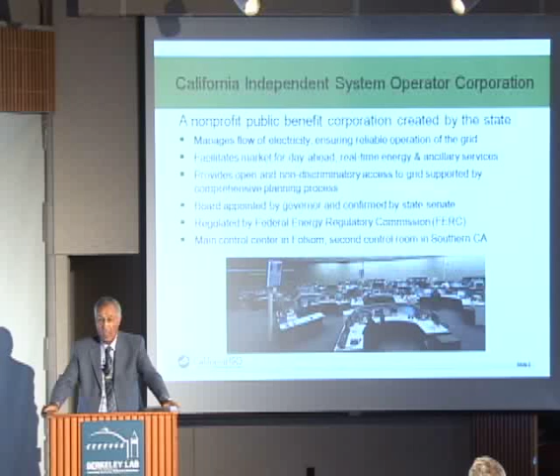What is the ISO? Just a bit of publicity. We are the grid manager in many ways. Our core responsibility is we operate the grid reliably, so we are the custodian of grid reliability for the state of California. We design the electricity market, we operate the electricity market just as we operate the grid, and the two go hand in hand. We're responsible for long-term planning of the grid. We facilitate the day-ahead market, real-time energy, and ancillary services. Ancillary services support the services to make sure the quality of service is appropriate and according to standards.

We provide open and non-discriminatory access to all players to facilitate a competitive wholesale market. We are regulated federally, even though we are a state entity, because it involves wholesale transactions and interstate commerce.

We're governed by a board of 5 appointed by the governor, nominated by a large group of stakeholders. The list is given to the governor, who nominates, and it is confirmed by the state senate.

I am delighted to have 2 of the board of governors in attendance: Chris Hafner, right here in the front, and the chairman, Mason Willrich, from the board of governors of the ISO. I can tell you also that if you want to have the title of governor, you can run for governor of the ISO and you don't have to spend any campaign money. So we call them Governor Hafner and Governor Willrich. When we talk about the governor of the state, we say Arnold.

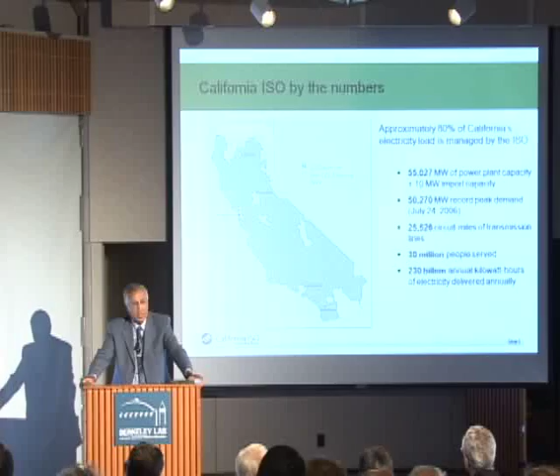So what we do in terms of volume: the state facilities in terms of megawatts capacity is about 55,000. Part of the challenge, and it will be even more of a challenge in the future, is that this state, different from any other part of the country or world, imports about 25% of our electricity needs from out of state. That has been a tremendous opportunity for this state to capitalize on the diversity of resources and prices in the region to make up the whole portfolio needed by the state.

So within the state itself, there's 55,000 megawatts of generation, and the peak demand has been over 50,000. If we only had the 55,000 versus the 50,000, it would have been a very tight situation. But the fact that we have that 25% import, keep in mind most of it is not certain until the very last minute, gives us a challenge but also an opportunity.

In comparison, let's take Spain, for example. I'll talk about Spain and California later, because Spain is also a leader in renewable resources policies. Spain has a demand very similar to ours, around 45,000 megawatts or so, but they have 95,000 megawatts of generation.

So they have almost 100% in terms of reserve or planning reserve. You'll hear a lot of times people say, 'Well, Spain does it, Spain did it.' That doesn't mean it can just as easily be done here like it is there. The challenges are different and the situation is different. They also have a lot more hydro that they can rely on, fluctuating up and down to balance the intermittency of renewables.

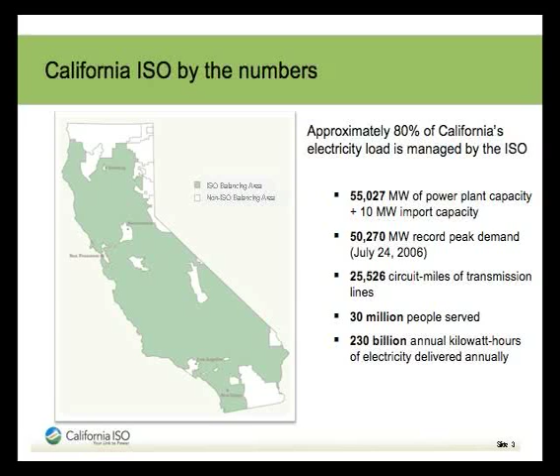We operate about 25,000 circuit miles of transmission. We serve 80% of the people of California—in terms of serve, we mean on the wholesale side. That translates to about 230 billion annual kilowatt hours. Our market includes a day-ahead market.

There are long-term contracts between suppliers, meaning the generation supplier versus the utilities. There's over-the-counter trading, shorter term like a month or a week, and there's the day-ahead market, which is when it comes to clearing on our market.

We also have a real-time market, and that real-time market operates on a 5-minute basis. So if you come and visit our control room, you will find a ticker just like you have in the stock exchange, where those prices are updated every 5 minutes.

Just to give you an overview, we price over 3,000 nodes or points around the system every 5 minutes. And that takes care of tens of thousands of bids every minute from generation and also from demand at the same time.

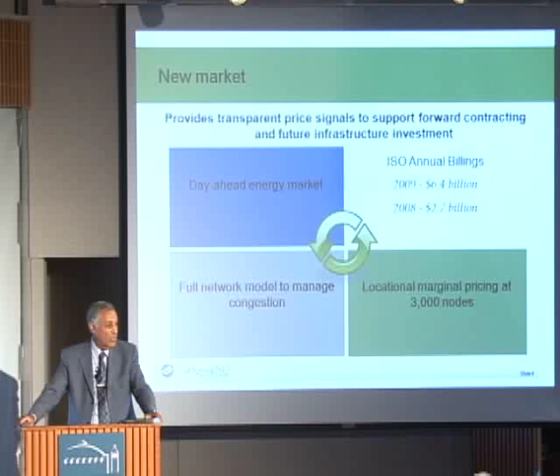It runs an optimization program based on mixed integer programming, which is one of the first times it's being used in that application. That sophisticated program runs in about 25 seconds out of every 5-minute interval to publish prices that people respond to. The whole idea is that those price signals indicate certain congestion points or the price of services we need at any given time.

The overall wholesale market volume of California in a year is about $30 billion, of which what goes through our market, which we settle at the ISO, is about $7 to $8 billion currently. That's what we settle, but every transaction, whether it's actually clearing our market or not, has to go through us. This is for the purpose of making sure that everything runs reliably.

Now, as I said, the title of mine is striking a balance between reliability, cost, and environment. Historically, even though you ask what was the balance, actually there was always imbalance, frankly. It depends on the time, and it's usually pushed by emotions. So for a long time, sometimes it becomes reliability and sometimes it becomes cost, and they were never balanced. It's just depending on the time, one takes over the other.

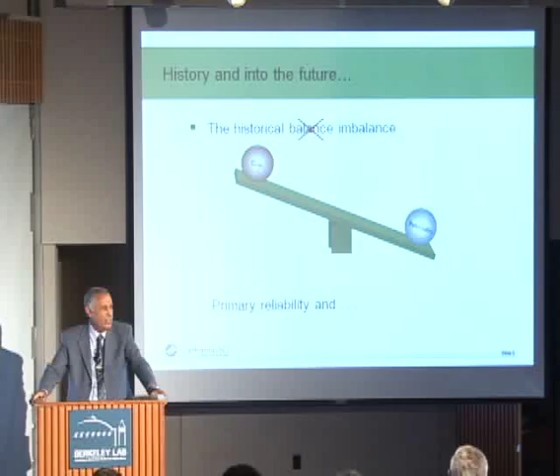For example, I think it was late 80s, early 90s, when I was a transmission planner in charge of a transmission planning group. To justify a transmission project on a reliability point of view, we were forced to calculate how much reliability is worth to the consumers, how much it's worth to the public, and what the cost of interruption is.

So what I did at that time, I knew a lot of smart people at the University of Saskatchewan, under the leadership of Professor Roy Billinton, who took on a national Canadian study to determine the value of interruption, or the lost value of interruption to consumers. He produced a good report showing that if it's interrupted for 1 hour it's worth this much, if it's 2 hours it's like $5, and the biggest one, if it's for a whole day, it says it's $200 per person affected.

And then at that time I said, just a second, you're telling me a whole day of interruption has an impact of only $200? I was told, according to the data we can gather from everyone, that's what it is. It ranges between 100 to 200, but we could not justify more than 200.

Now you can imagine, if I go to a commission saying I want to build a billion-dollar project because of an issue that happens rarely, and the impact is only $200 per person, I don't know how many commissioners would agree to let me go on with that project. So I almost wanted to kill that report, but I just put a lot of qualifiers in it, saying it doesn't cover this and that.

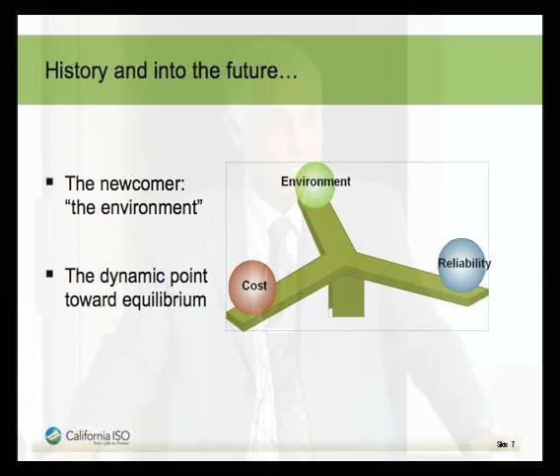Everybody's realizing now that the cost is very high. So we went from one extreme to another, and it looks like we're never at an equilibrium where the two are really balanced. As we struggle with that balance, a third player came in, which is the environment. Now we have to balance all three: reliability, cost, and the environment.

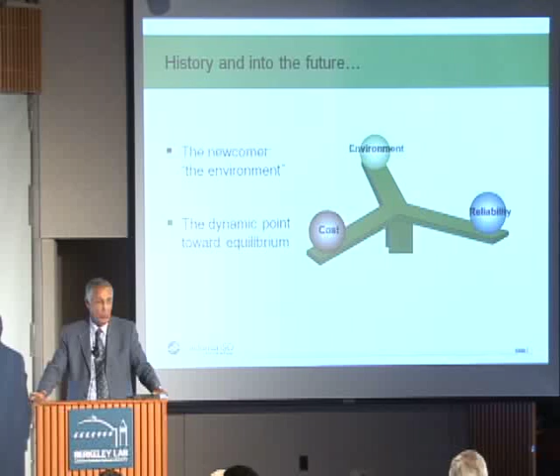Today, if I had to say which one is heavier, I would say environment. All the energy policies are now driven by environmental goals, climate change, and limiting global warming. It is getting much more complicated. Adding that dimension doesn't make it like 1.5 times harder, it's almost more than an order of magnitude. It combines societal value from the environmental side that you can hardly put dollars on, at least until the costs become unbearable for people to feel firsthand, with monetary value and service quality.

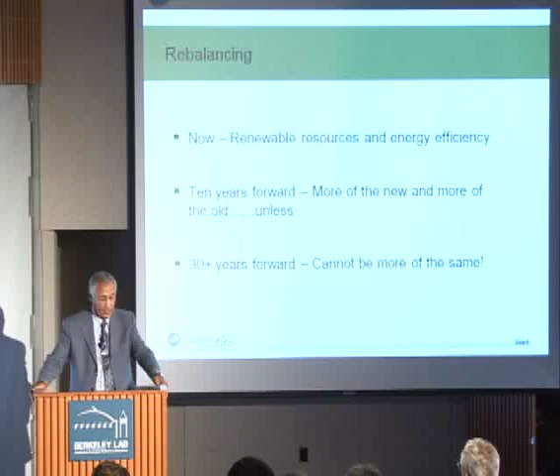Now, what are we doing about it? The solution seems to be renewable resources and energy efficiency. Energy efficiency has a long history that's been largely successful, especially in California. Renewable resources are new and have their own challenges. But right now, these are the two main tools the electricity industry is using to limit emissions and have a reasonable, positive impact on global warming.

10 years forward, looking at California's policies at least, it's more of the new, meaning more renewable and more efficiency. But there's a piece missing that I'll highlight in the rest of my presentation: you also need more of the old. By that I mean facilities of the old kind, gas-fired, hydro, or whatever, to back up the intermittency and uncertainty in renewable supply. Now, 30 years forward, and we'll touch on that too, it cannot be more of the same. What would it be? Well, we'll see.

Now, what does California have? All the programs in California that tackle this, the first program is the so-called 1 million rooftop photovoltaics. The governor initiated that about 3 years ago, and the commission approved it. It's about $3.5 billion in ratepayer subsidy to support 1 million rooftops in the state.

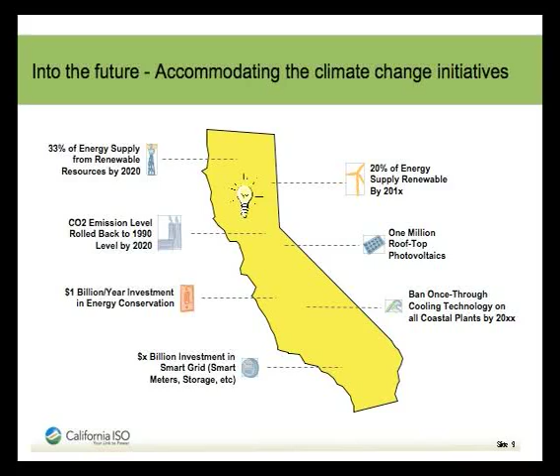And then one of the other big pieces is related to air quality, or CO2 emission level rolled back to the 1990 level, and that means reducing it by 30% by 2020.

On its own, that's pushing the target more, the 20% to 33%. But in large part, achieving 33% of energy supply from renewable would be about half of what is needed from the electricity industry to achieve the CO2 emission rollback to 1990.

So that makes the color of the state moving from gold to green in totality.

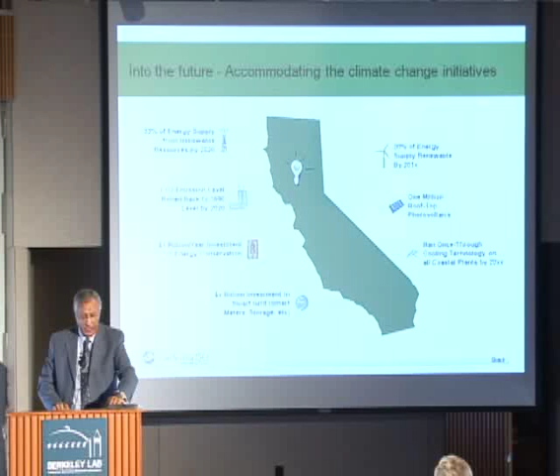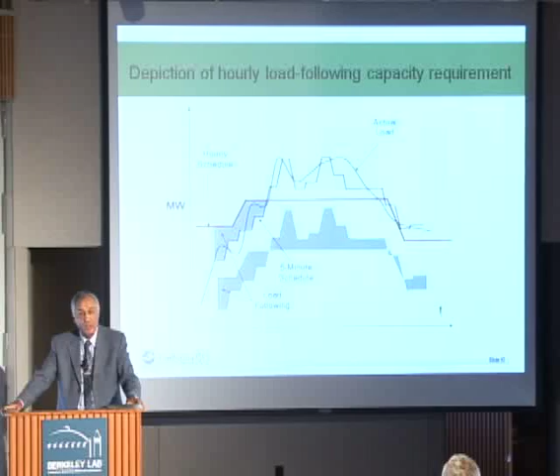Now, how do those things, all of those things that I put on the map, work? If you do each one of them on its own as a target, you will get a disaster. You will get probably more than a crisis than before. But the key is that they all have to be integrated.

So when we say ban once-through cooling or restrict the operation of thermal generation, if you do not do it in a coordinated way with the implementation of renewable resources, then renewable resources on their own will not be able to operate reliably and support the grid. So the more you restrict certain facilities that you think are hurting the environment, in part, you are not going to be able to support the implementation of the full scale of renewable.

That is really the key that we're trying to get people to understand, and your help in that will be tremendous. We've talked about it this morning as to how these things fit together.

This is where the ISO, I'm proud to say, played that part, because all of those initiatives, by appearance or by the sound of it, are a combination of climate change policies. But actually, when you look at them, they also, in combination, give you the grounds for energy policy, whether on the state or the national level.

Sadly, there is no national policy on energy now for a long time. And any time it comes up in a congressional session, any attempt to actually establish one somehow doesn't get to the top of the list as a priority.

Now, I'm going to use certain terminologies, and before I wave hands, I'm going to make sure that I explain what I mean by what, so when we talk about the impact, I don't lose you, hopefully.

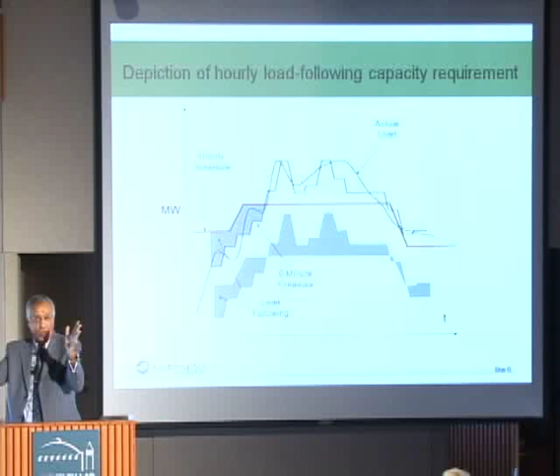And then when it comes to real time, past that hour, we do something called the dispatch, which comes in 5 minutes. Because the difference between the load or the demand, the green one, and the red one, cannot stay the way it is. Otherwise you get problems with the system, as you power engineers know. So it has to be closer. So the hourly dispatch is basically refined by the 5 minute dispatch as you go.

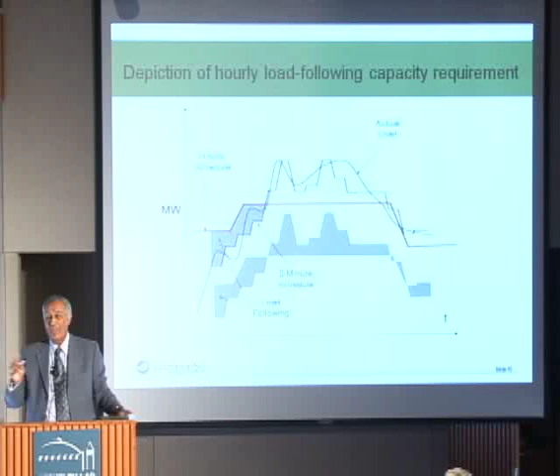Now, the difference between this 5 minute dispatch and the demand is what we call trying to follow the load. But remember, in this picture, the only variable is the demand, and the control is by the generation. Now, later on, we're going to talk about the big variable now that the resource, when you have renewables, there's big variability in the resource as well, and how that would affect the situation. So that blue area is what we refer to as load following.

Now you get to something that's called regulation. Even with that, now that you had followed, the difference between those even refined values and the actual load, which is now another micro level of control, is referred to as regulation.

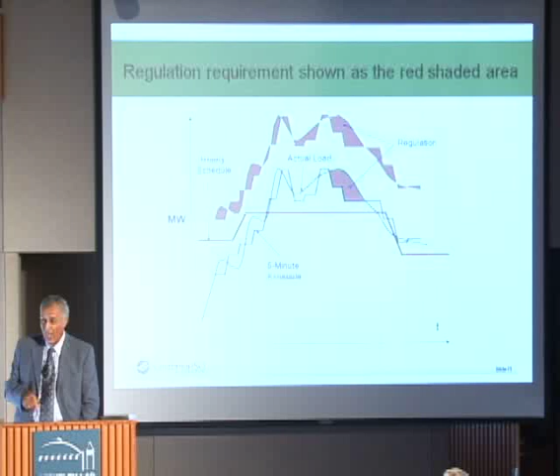If you look at this area, as we speak right now, it is happening that all the job of the operator is to balance things out, so that in every instant of time, the demand and supply are in balance. The load is the one that's changing, and you're making the whole fleet try to change at different times, from an hour to 5 minutes to within the 5 minutes, to make sure the two are balanced.

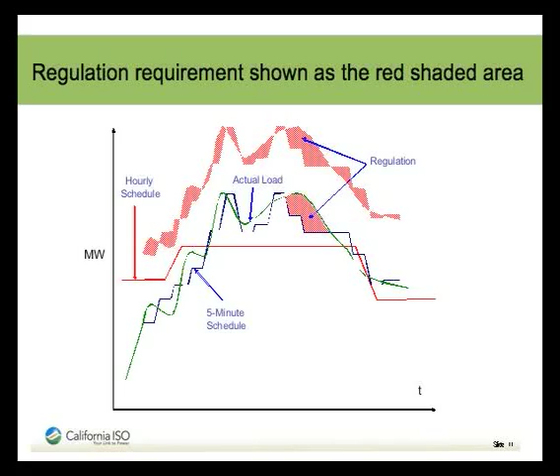Keep in mind, later on, when I talk about how this picture would change when the supply side is also reasonably unpredictable, and not flat even within 5 minutes or an hour, never mind predicted, that's when I'll talk about load following and regulation, so you'll know what I'm talking about. This is actually real data, sometimes scaled to make the point, but based on real data.

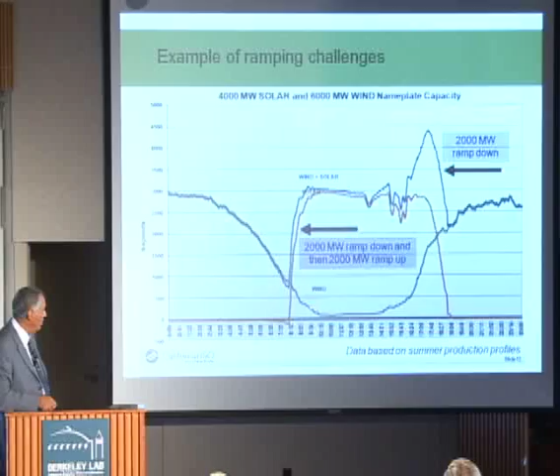So here's wind, and wind blows at early hours and late hours of a day - this is over 24 hours. And solar comes at a certain time, jumps up, stays, and then comes back down in a very sharp way.

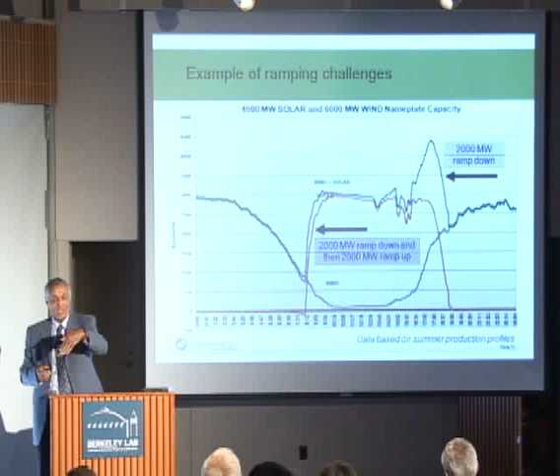If you don't consider solar at all, as the wind is dying down and the demand is increasing, the rest of the fleet would have to respond to two things: the demand growing, and part of the supply, the wind, decreasing. In the past, or as we do today, it only responds to the demand increasing. Now, when you have wind, they would respond to demand increasing and wind disappearing.

So obviously they would have to do more within that short period of time. Now some people think solar will help - it would help probably in this area, where the wind is not there and there is solar. But at this point it makes things very interesting, because now the fleet that used to follow the load and the easy decay of wind, if you add solar to it, would have to do exactly that in this period of time.

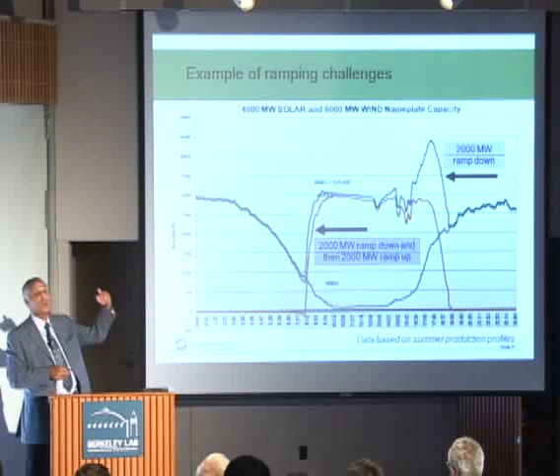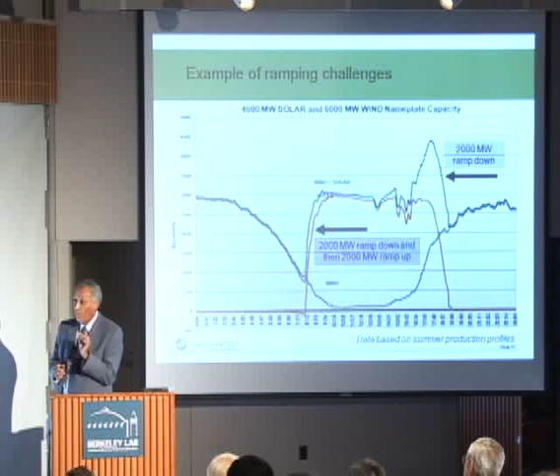And then when the solar comes in a sharp way, it would have to ramp down in a very sharp way. And then as this stabilizes, the demand would have grown at that time, so it would have to jump up again, back again. So you could see now we have a fleet that is going up and down in huge amounts within a short period of time that it did not do in the past. That is the kind of support that an existing fleet has to do, even more than it did before, to support so-called renewables.

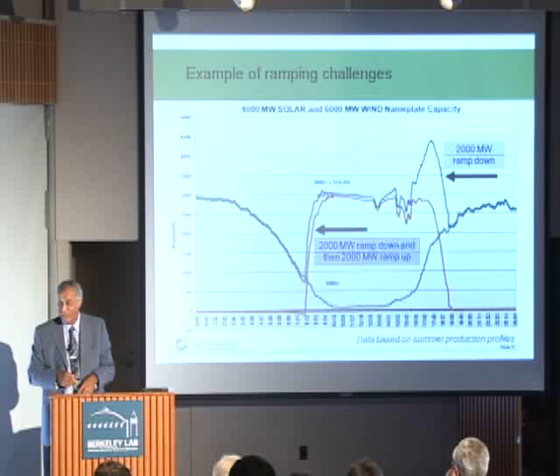Of course, at the tail end, it's the other way around. Now, solar with wind - you could see that in these cases, in the beginning and at the end, it makes things worse than wind alone, but in between it makes things better. Now that curve, as much as it looks like it might be great...

You can see in a case like this, here's the demand, the blue one. The wind typically is like this - not typical for that day, that's an average. And then the solar is like this. So here is the demand, now the wind is coming down like this. The rest of the fleet will have to, at this point, do two things: make sure it's following the demand, while also compensating for this decay. Until this point, where solar is coming up, it will have to go down again. And then once it's flat, the demand is still growing, so it will have to go up again.

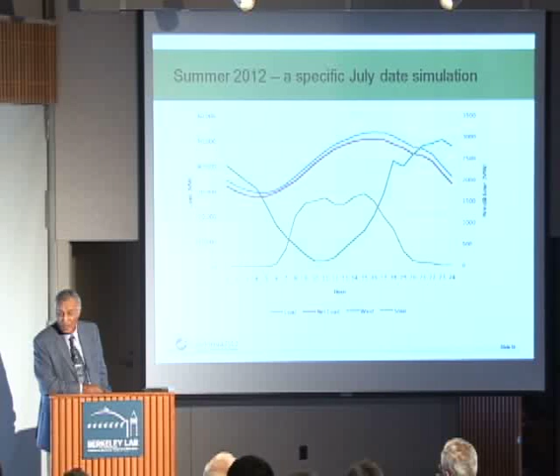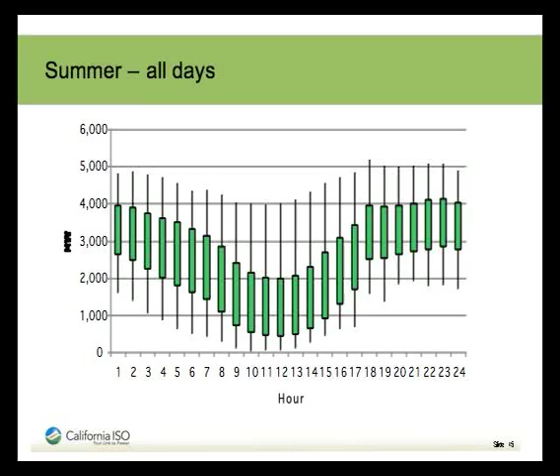So that's a kind of a date in the summer, that's an average. Within the average, you see that now the volatility, which is what we call the whisker curve, from a minimum to a maximum, shows how wide the variation is within the hour in a day like this. This is 2 standard deviations of that statistical data.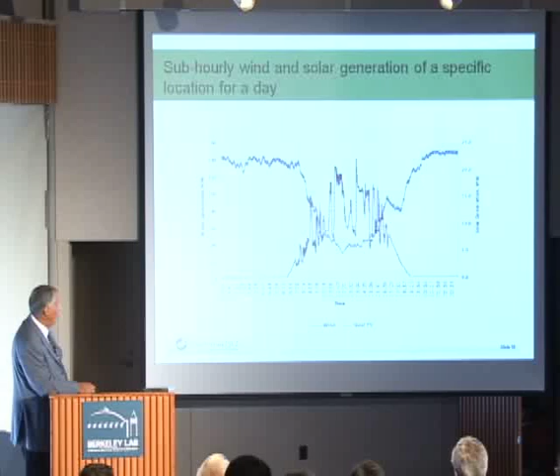You look at a different time of the year, like fall, and it's kind of flatter, at least in the morning. Solar is not as predictable even, and we'll talk about predictability of solar later on. Wind goes very heavily, or much heavier, at a later time of the day.

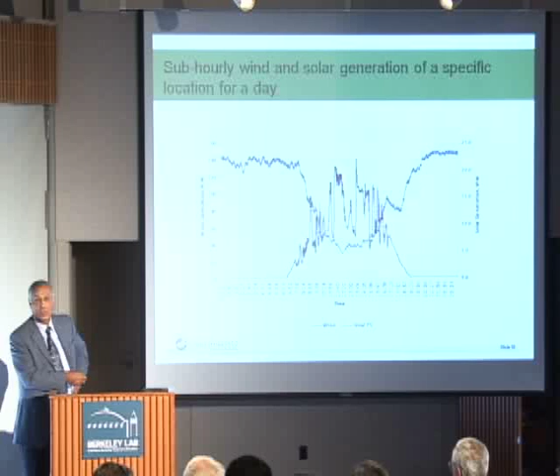Now I gave you the average, but within the 24 hours, here is what I was averaging. The wind, even though all people talk about wind as an evil, solar is actually much more challenging. Predicting wind is one thing, but predicting solar is a much more significant and much more challenging issue. Even for us to be prepared, we have a reasonable amount of data about wind, but we have very little data about solar. There's a lot of research now on solar tracking, on the clouds, where they are, and what the intensity is, to predict how they change.

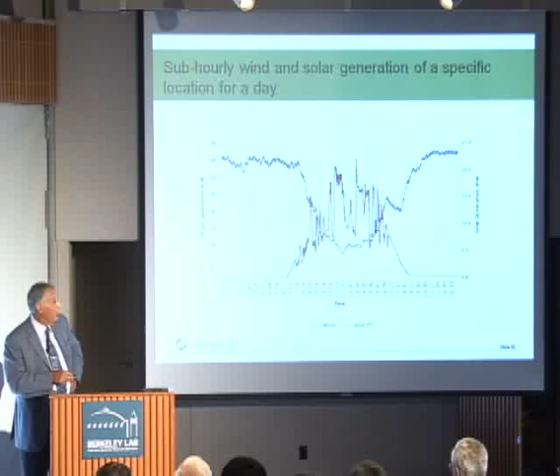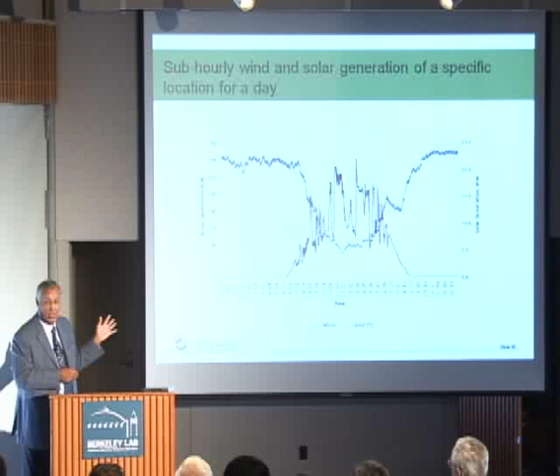But the red is actual solar within a day. So what I showed you as average, when you average this, it looks nice and people say it's sunny, but it only takes a passing cloud to get that sharp change. Those sharp changes represent a huge duty on the facilities that are supposed to respond at that same speed. We never faced this before, because we were responding to demand changes, and demand changes were never at that magnitude or that fast.

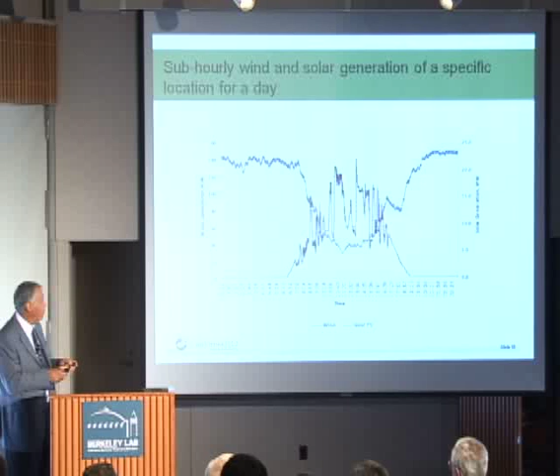And if you go, actually, this is the whole day. Now, if you look even within an hour, you find that the changes within the hour, and within minutes, are even more challenging for solar. The wind is a challenge too, it is significant, but not as significant as the solar side.

Keep in mind, again, my job is to balance demand and supply by the split of a second, or by second. Otherwise I'm violating major standards, exposing the system to major problems. So that gives you the issues with controlling or operating a grid or a system like ours with these kinds of variables.

Now we say, how big is that? Remember I said that 55,000 megawatts of generation is what's in the state? The 33% portfolio translates into 28,000 megawatts of nameplate capacity. So we're talking about 28,000 megawatts of nameplate capacity of that nature in a 55,000 megawatt system, on a demand close to 50,000 megawatts.

Compare that to Spain. As I said earlier, Spain has 45, but they also have a lot of hydro, and they have 95,000 of installed capacity of other resources.

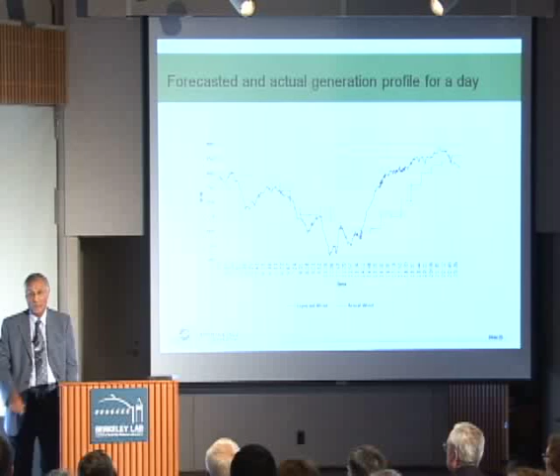Another area, and I was getting to the forecast. Forecast is not just how much wind you're going to get. I was actually very pleased to see, for the first time, that our people are working right in this lab, and this is part of the ramping of my IQ, understanding that you're actually doing the right thing - translating wind into power, into megawatts, is another issue.

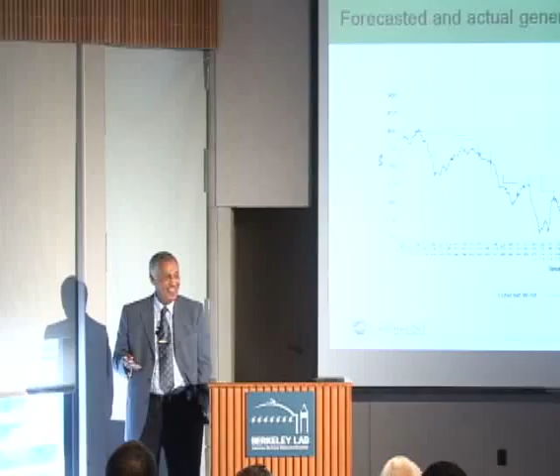It is, yes, you have a wind speed, but once you have wind speed, does it give you the same amount of power? Not necessarily. I understand there's good research on it and we'll watch it very closely. Also, it's not just how much wind I'm going to have tomorrow between such and such hours, but exactly when it happens in time, so I can prepare for it with load following facilities and regulation. So it's not just the amount in a rough way, but the exact timing of it that's very important to our operation.

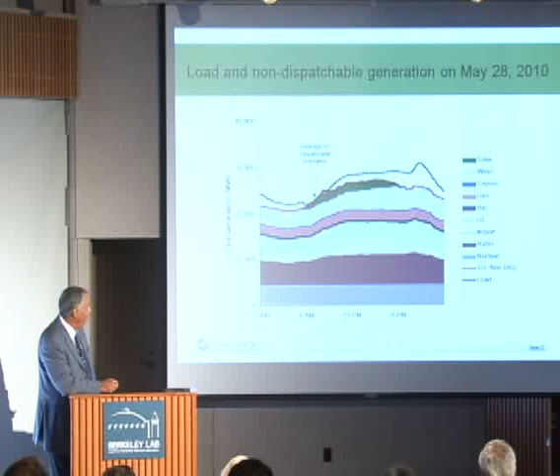Another area of concern we look at is something like this, where wind, amongst other things, we call non-dispatchable. Non-dispatchable means it's not something you can push up and down in shorter periods of time. In that category you have hydro - especially not hydro with storage, but run-of-the-river hydro, that as long as there's water, it just runs. Nuclear, you don't push up and down, it's very much base load. You also have bio, wind, and solar. There are some times in early hours where the accumulation of all of this is equal to, or sometimes even higher than, the demand.

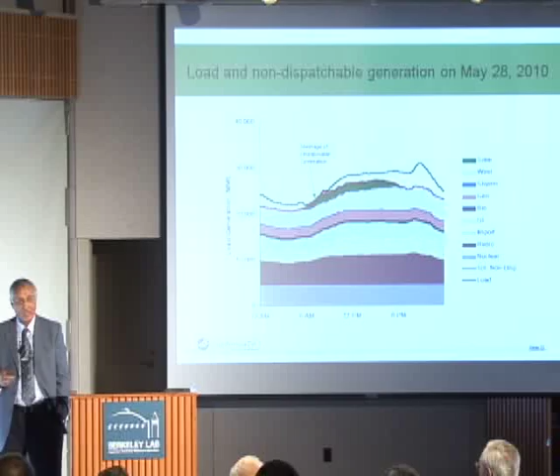And that's when you say, I have more energy than I need. What do you do with it? The way the market deals with it, usually you find in cases like this that the prices of balancing energy in the ISO go negative.

Meaning you pay people to take it. Part of the challenge is we can't have too much of that. Why? First, there's a lot of time where there's no buyer, even at negative prices. I have my own, and now what am I going to do with it? That's one. But even if you get someone who can take money to take the energy...

What you have done now is you pay dearly for the generation of renewables, because by definition they are more expensive. And you also pay dearly for someone to take it. A lot of the time, it's actually taking it from the generation at the same place. It doesn't even have to come to California, but it's scheduled to California. So the two balance each other, and you pay twice. And that is not right from an economic point of view.

You can see now the balance we're talking about, striking between being reliable and economic. We're trying to get the system reliable, so you can't have over-frequency by generating more. And at the same time, from an economic point of view, you want to make sure that the economics and the market are running properly.

A case is not just the shortage of wind when people say the wind doesn't blow, but even if it does blow, and it blows hard. I borrowed this from my friends in Spain. This is a case where you see that actually a lot. And when we get that to 20%, full 20%, then 33% overall, we're going to have more of those.

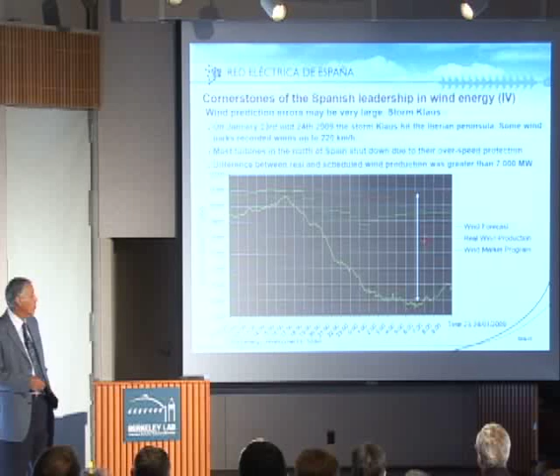When the wind blows very hard, very high, you have to stop the turbine. You put the brake on because mechanically you can destroy the turbine. Here is a case where it was very high, about 220 kilometers per hour, that's like 140, 150 miles per hour. And they had to shut it down.

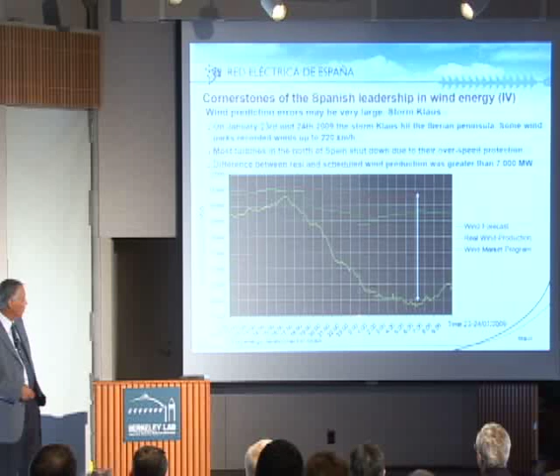That means a sudden drop, a gradual drop of 7,000 megawatts that has to be taken up by other thermal plants that would have to come up to actually pick up those 7,000 megawatts. So the drop in generation is not just when the wind doesn't blow, but also when it blows hard.

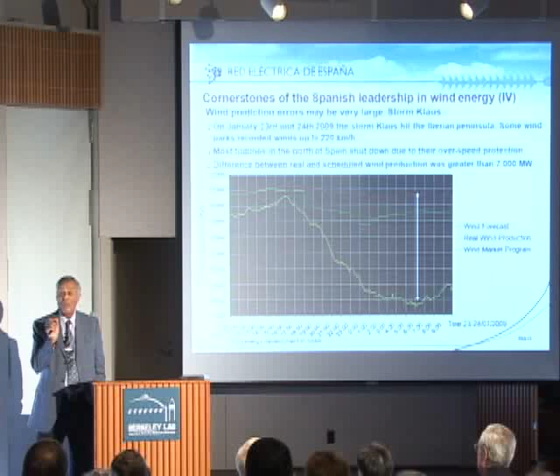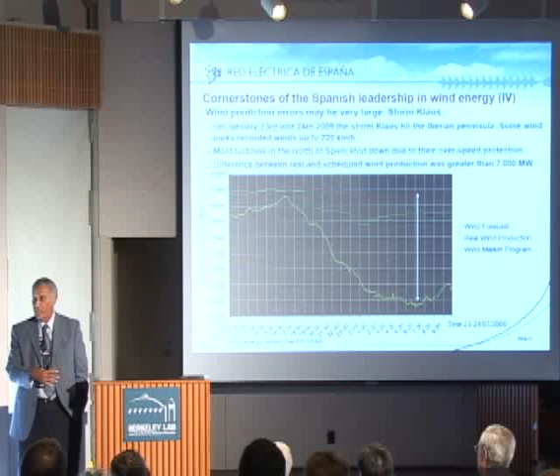And when. Very key, when. Because it depends on when, it will also determine when I'll be able to bring other facilities to back it up. Remember, many of those facilities, if you don't schedule them from the day before, they don't come because it's too late.

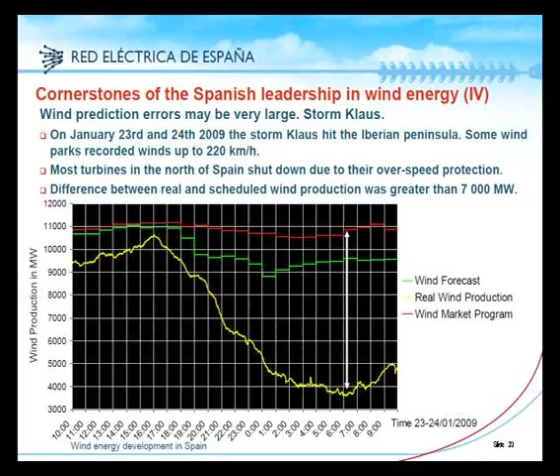Which comes to the point that we need more of the facilities, remember I said new of the old, meaning old fuel-based. But in terms of technology, it would have to be ones that fast start. So I can give it maybe from 15 to 16 or 16 to 17, and they can come in one hour. The problem is, now I try to get people to say I need more gas-fired generators that are fast to start, because without it, I can't do renewables.

Very tough message, very tough message. So keeping the old ones in place and even having the new ones that I would need more of -- I will tell you how much more we need for the case of California based on the simulation. Now what does that say? We need more, and need more.

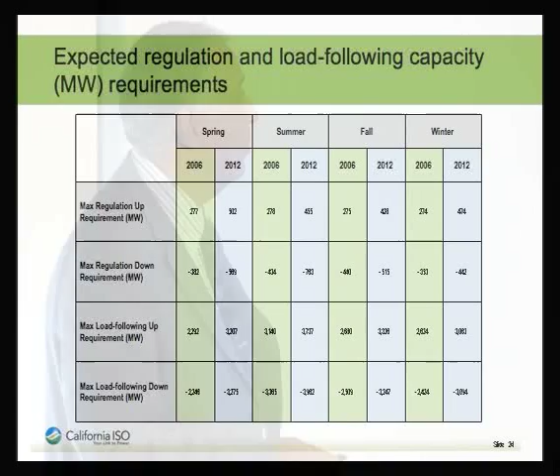Now that I explained what is load following and what is regulation, this is the impact on the load following capacity in the four seasons. I'll give you some indication when we say more, how much more. Right now, from a regulation point of view, based on the highest demand in our record, we need about 277 megawatts.

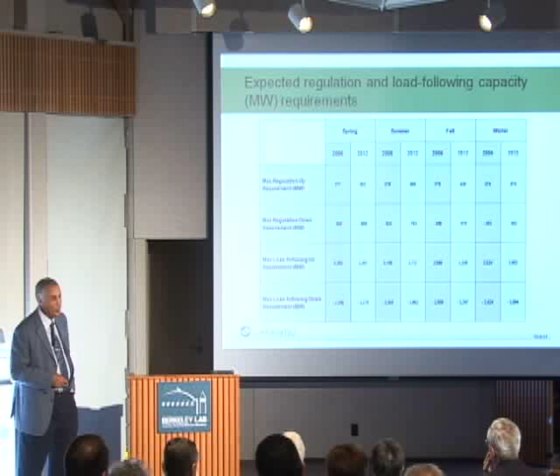On the 2012 case, that number would be 500 megawatts for regulation. On the negative side, the highest we had is 380. It's probably about 570 comparable.

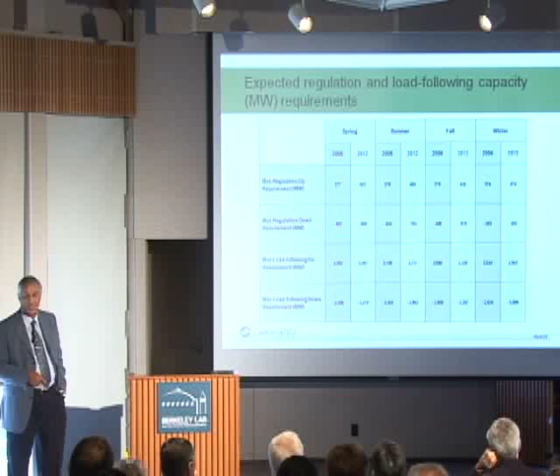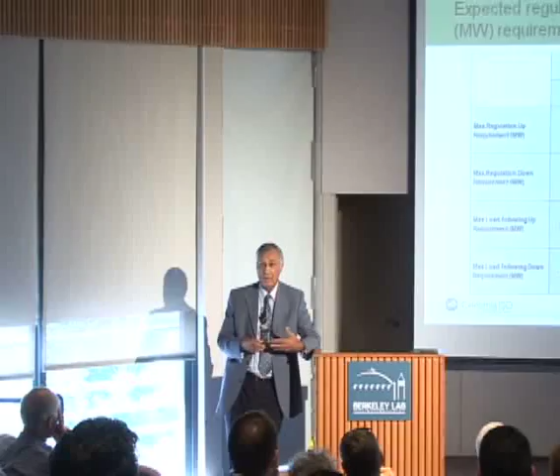In terms of maximum load following requirement, it's about a 30% increase. So the existing fleet we've relied on in the past would generate less energy because we have renewable. In terms of energy megawatt hours, they would produce less. But in terms of the ancillary services they did in the past, which we didn't pay much for, it was just part of the whole deal, we need them even more now.

And if you shut it down for once-through cooling limitations and emission requirements, yes you save on one side, but you hurt the other.

In terms of speed, I was asked that question, how fast do you want them to do it? That speed, by the way, for those working on storage technology, is very important as to how storage will back up in combination with traditional generators, how they can meet that high speed.

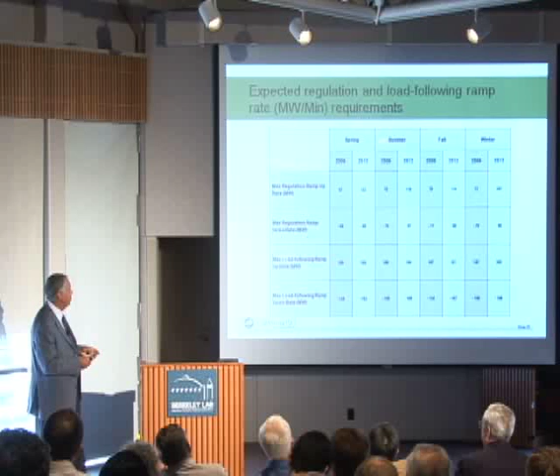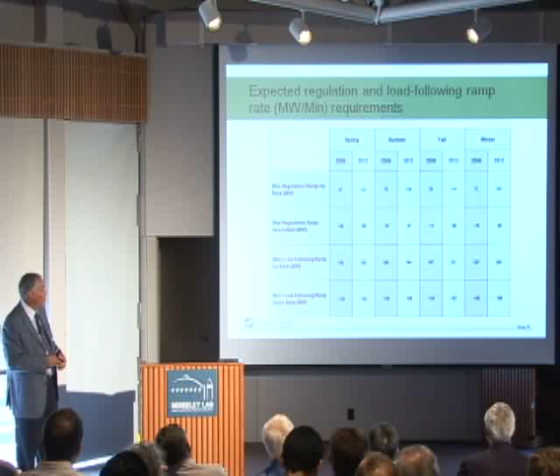Traditionally it's about 60 to 70 megawatts per minute. The 20% scenario will increase that to about 120, about double. So it will go twice as fast. Mechanically, that means more maintenance, and some facilities can do it, some will not be able to.

So I have to work on that, and that's what we've been working on: what facilities can give us that service, and not just that, but how can I design market products that incentivize them to stay in business and provide it?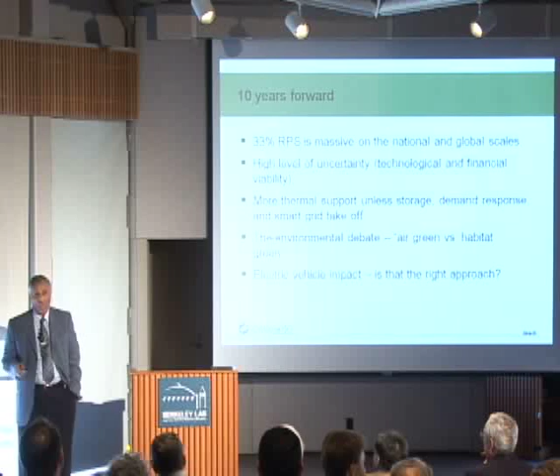We are so happy and pleased that we're at the forefront, showing the world how to do it. Frankly, since then, with the challenge, I sleep like a baby, I wake up every two hours and cry. But that's the challenge, you face it and say I love it, we're going to be leading this. At the same time, the challenges are quite significant that we're working on.

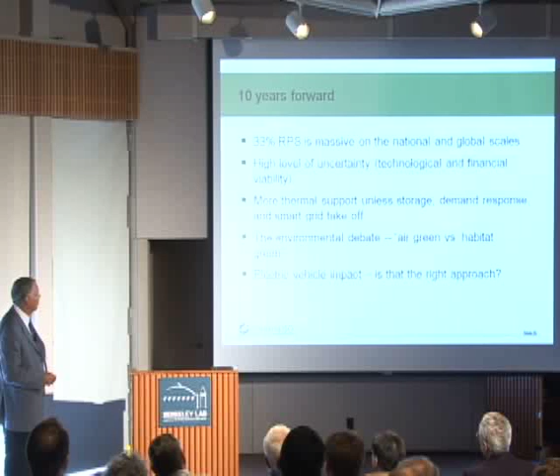From all my dialogues this morning, it looks like many of you are hitting right on it. There's more thermal support needed than what I showed in the last tables, unless, and that was the 'unless' in my first slide, storage, demand response, and smart grid take off in the right way.

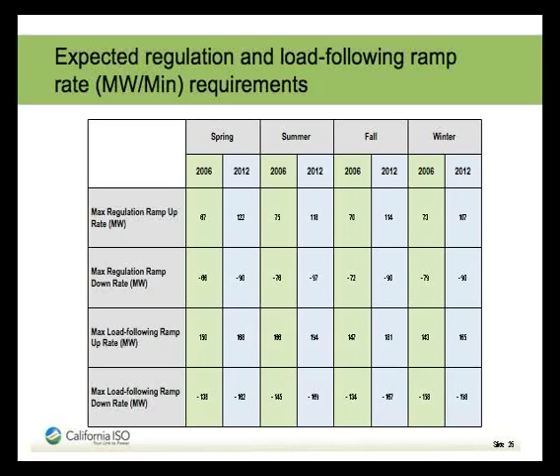There's a big environmental debate among environmentalists, and both sides are very passionate: the so-called air green and habitat green. I've met some of the most respected people in the environmental community who classify themselves as habitat green. They use very strong words, they say we are raping the environment through high penetration of renewables, because of the landscape it takes from deserts and mountains, replacing habitat environment with energy resources. They're solving one issue but creating another bigger one, impacting the environment on the habitat side. So at 33% or higher, even environmentalists are split on whether this is the right way to go.

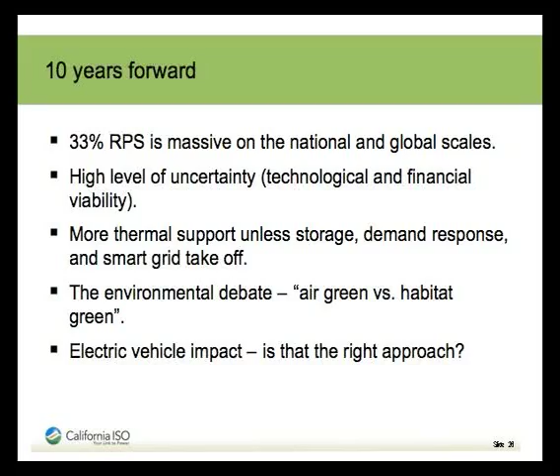On the demand side, there are a lot of newcomers, one being electric vehicle impact. On paper, we know all the benefits and advantages of electric vehicles. But is it really the only approach? Is it the right approach for transportation? I was discussing this with some colleagues this morning. The electrochemical industry needs better credibility with the public, especially when it comes to batteries.

I think most of you can relate to this: how many battery specifications of all kinds have you read and actually used, and found that it actually matches what you expect? Hardly.

But at the same time, you can't ignore it, it is one impact. I was pleased to see it on your chart this morning, and I hope it does not go away - the fuel cells. We were investing heavily in fuel cells, very heavily, and then it all kind of went down, and now it's all batteries. Frankly, the balance between the two has to be there. I think there is room for fuel cells. It should not go down, and I hope that with all the attention to batteries because of electric vehicles and energy storage on the grid side, fuel cells research does not go away.

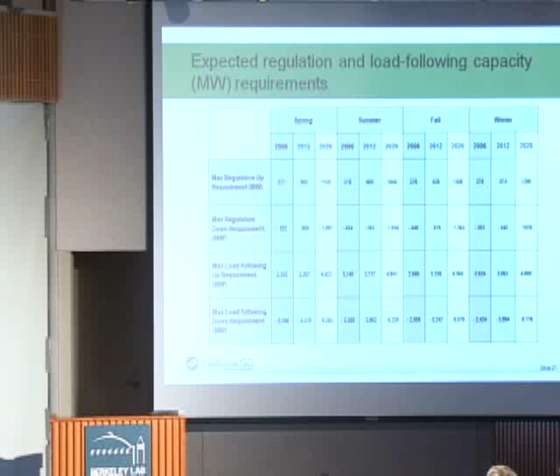This is talking about the traditional fleet - 4 times the duty compared to what it is today. And if you look at the load following, it is almost double what it is today. That is what the existing fleet will have to do to support renewables.

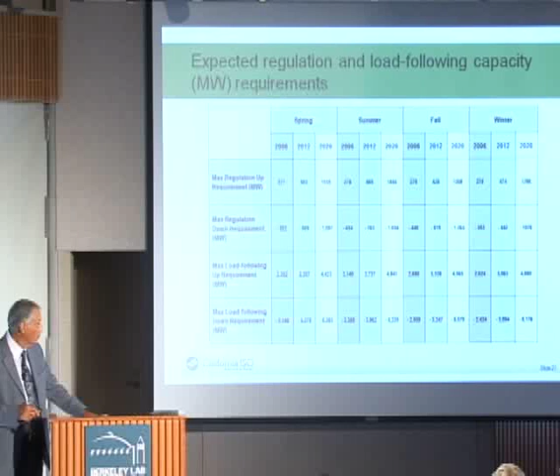And the rest of the story, again this is by season. From a speed point of view, it's even more compelling. You see how fast will it go? You see it doubled here. It doubled again - it's almost like 6 times as fast when you talk about it.

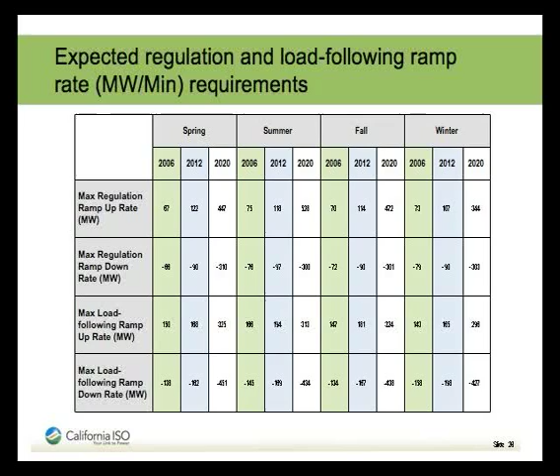Why? Because for 2012, the assumption is it would be mostly wind. For 2020, the assumption is most of the addition will be solar, because the advances in solar technology are not quite there now from a capability point of view, but the assumption is that by 2020 it will be there. And that's what created that demand for much higher speed in response to regulation and load following.

As we go forward 30 years now, those of you who are 15 years and younger will have to worry about this. I would suggest that you look at something from EPRI, it's called Prism 2.0. It is looking at what the world would look like, what the nation's supply portfolio should look like to achieve an 80% reduction of emissions at minimum cost or at reasonable cost.

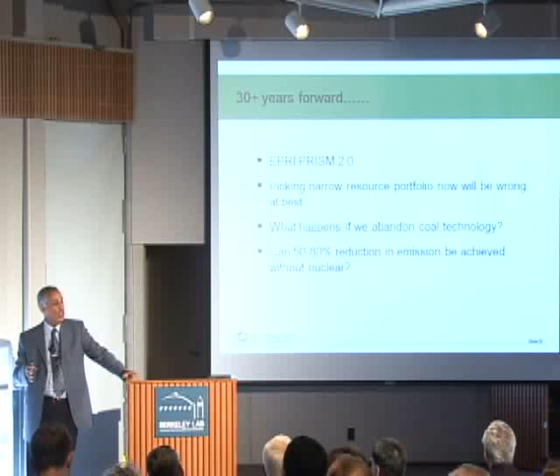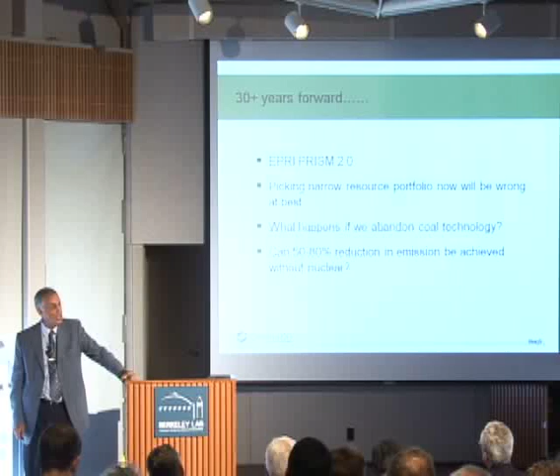And the answer is everything is on the table - everything: coal, clean coal, nuclear, solar, wind, geothermal, gas-fired, the whole portfolio on the table. And when you get into the details of the Prism, it actually varies by region. Some regions would be more economic for them to do more clean coal than others. If you do that whole portfolio with that mixture, which is everything on the table with varieties of percentage depending on the region,

you get lower cost than what you would do with traditional gas-fired. And the key to that is they put a $50 price on carbon. So if you assume that carbon will have a price, and if you pay that and use traditional sources, it would be much more expensive than having everything on the table, especially clean coal. Now from that point of view, picking a very narrow resource portfolio will be wrong at best. So to say that wind and solar is the only thing and we'll go forward with it, that would be wrong.

Now what happens - and you know there's a lot of passion against carbon, and yes, we're all passionate about reducing carbon, but what about all the technologies of cleaning carbon? Now abandoning coal from our portfolio altogether as a solution, as the only solution for coal, what would it do? First, the demand on coal - because we're out of the equation, the global demand on coal would be less, and price would be probably less.

So what would it do? Most of the world is in a developing stage, and they will continue to be. What they will do - someone else will burn it.

And it will be cheaper because we are out of the equation, and there's more coal than otherwise. Now, if they burn it without anything, just like the old days, well, we haven't solved the global warming issue. Or another thing is that they might develop a technology for cleaning coal. It will be in a technology and on standards that we did not own, we lost.

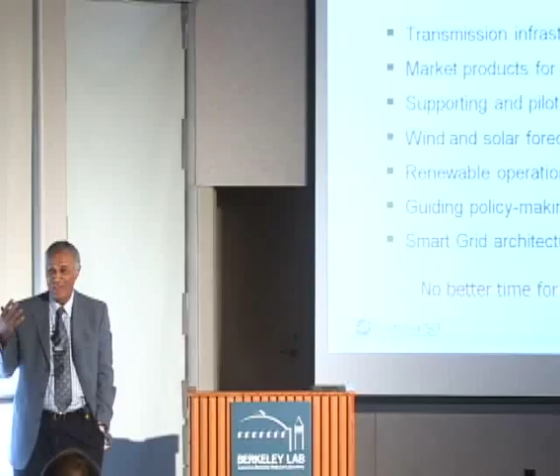We're developing market products and services because now that we need that fleet to provide services that was not quite valuable in the past, but now we need more of it in the future, you have to develop market products and services and price it right so those people can have incentive to stay in it and actually invest to provide it.

We're supporting and piloting storage technology, wind and solar forecasting. We're spending a lot of work on it.

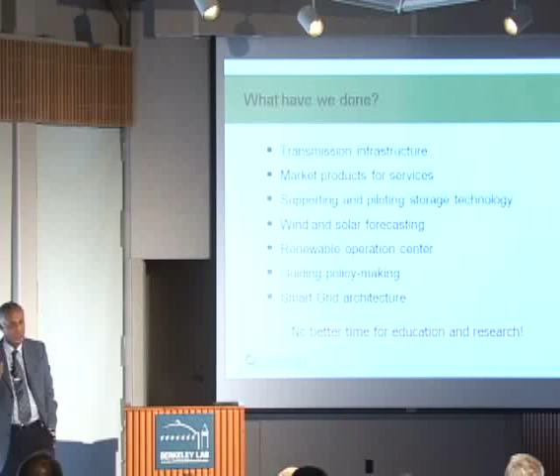And when it comes to wind forecasting, it's a question of how much wind do we have tomorrow, how many megawatts and so on. Anyone I talked to, I was actually proud we got to 15% and said, well, let us keep going. Then I went to Alberta, and asked what did you do? They said, well, we did a great job, we got to 15% and we're still going. Then I went to Spain and they said, oh, we got to 15% too. It looks like 15% is the way it is, but I don't know whether that is the end or what. We all kind of get to that level and we're still there. Whether that's the way it is or it can be better, I am not sure.

But certainly solar forecasting is something that is going to be very significant, and it's nowhere near the advances we made on wind. We are building a renewable operations center as part of our new control center. We are trying as much as possible to guide policy making, and that is harder than any technical issue that we faced or we are facing. And also, as much as possible, we try to get involved in the smart grid architecture.

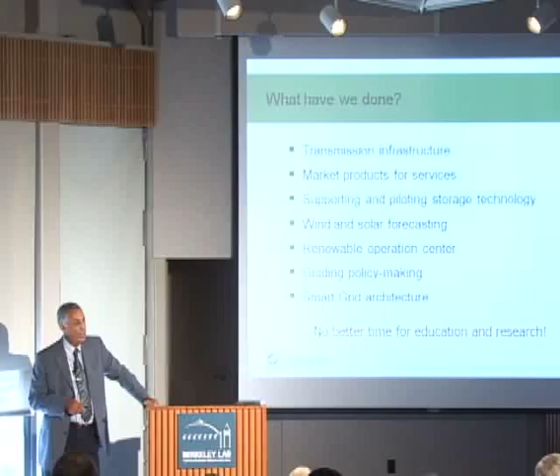Now, there is no better time, frankly, for education and research than it is now. And one of the things I hope doesn't continue to be sad is even the education part of it, not just the research. When you look at how much education cost is escalating on a student or an individual, and what we're competing with as an economy or as a technology are countries who have virtually free education, it is not getting the attention it deserves.

In fact, in my mind, yes, there is a healthcare issue, but you look at the life expectancy of people and how healthy are we getting, apart from individual cases, and how well we're doing versus the challenge with getting that higher level of education in terms of cost. The latter is not getting the right attention.

So I'm talking to many of you who are educators. I certainly would be one of those people who would carry the mantle with you, but there is no better time than now for both education and research. Thank you very much for your attention.